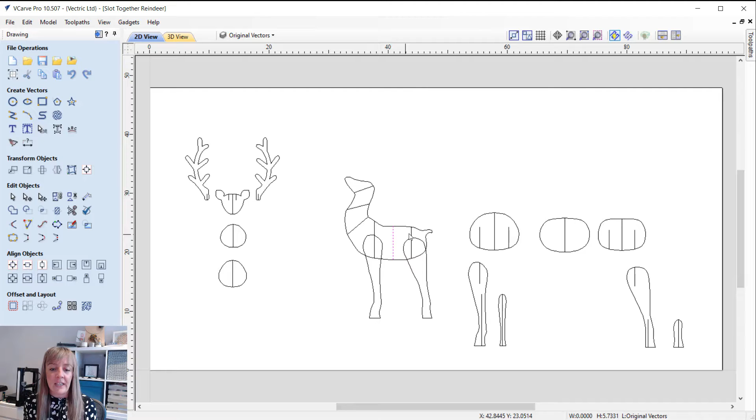Okay, so in terms of the file, we'll just take a look at how I created this. So I started off by just drawing out the rough side profile of a reindeer. So we've got the main body, we've got two legs, and then what I've done is I've actually split up the side profile with a series of lines, and these lines basically represent where I want to slot in the front facing parts, and each one of these lines actually matches up to a corresponding shape that you can see over on the left hand side.

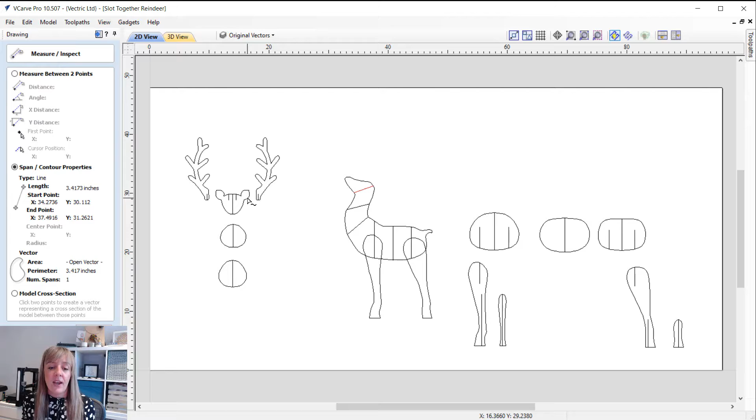Okay, so this shape matches up with this line here, so if you go to the measure tool and use span or contour properties, we can see that we've got 3.4173, 3.4173. And so by using the exact same length of line, we're able to then create the front facing part, knowing that when we ultimately come to slot it together, it's going to take up that whole space there. So that's why we're doing that, just so that we can ensure that we are working with accurate measurements and that it all matches up. So I've done that for all of these.

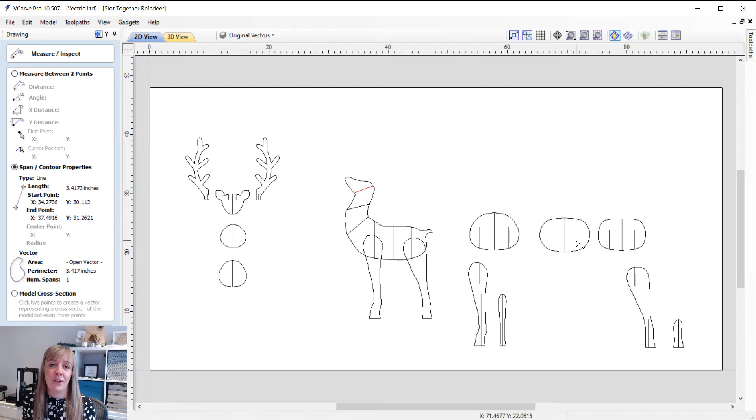But for this, I'm just going to give you the file and I'm just going to tell you what you need to edit according to your material thickness, so you can just get that on the machine and get it going. So this is pretty much all of the parts. So then with those parts, I then edited the slot sizes. So you can see now that all of those lines that represent those slots are now split in two at the halfway point. It's just the easiest way to divide them up.

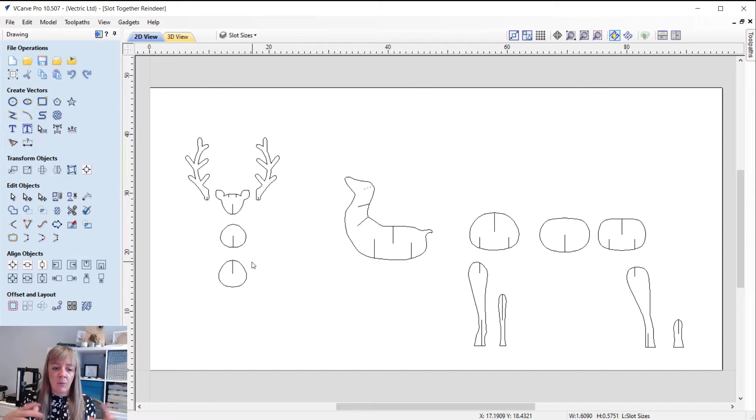You can divide them up how you want, but for me, I just find it super easy just to split them in half. And so we're going to be cutting into all of the lines that you can see here, whereby we will create slots for them shortly, and those slots will enable us to slot the alternate part, the front facing part that matches up to those side profiles. Okay, so those are just your slot positions, and then we've got the actual slot sizes.

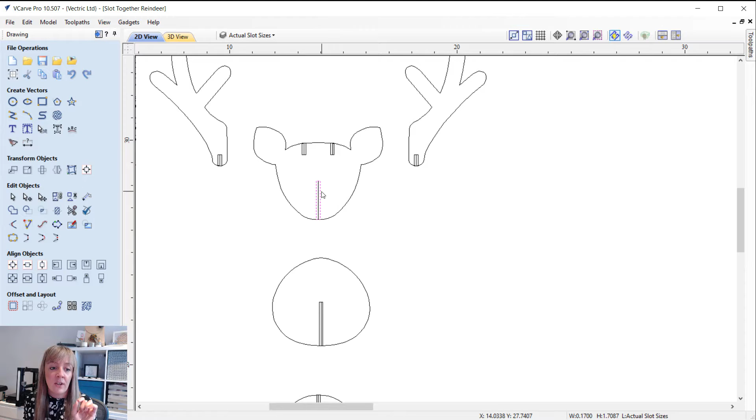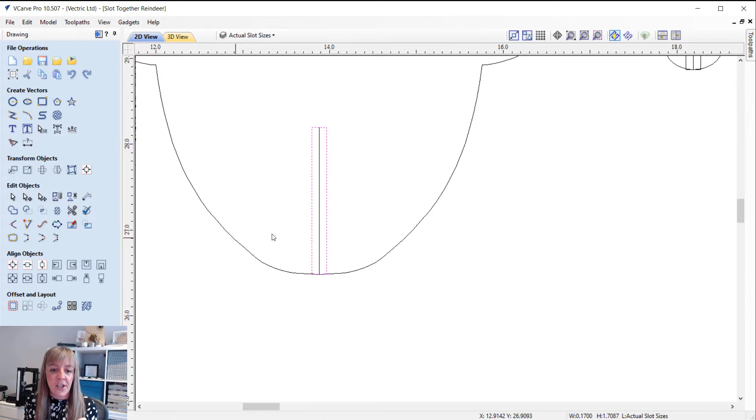So this is the layer that you're going to edit, and it's going to be edited according to your material thickness. This is a slot together project. You need to ensure that your slots match up to the material thickness that you are using. So in this case, my slots all come up at 0.17 inches wide, as that's the material that I'm using. So all you'd need to do is go in here, go to the set selected object size tool, where you'd set your anchor point in the center of that rectangle. You're going to uncheck link XY, and you're just going to alter this value to your material thickness. And you're going to do that for all of the slots and make sure you don't miss any of those out.

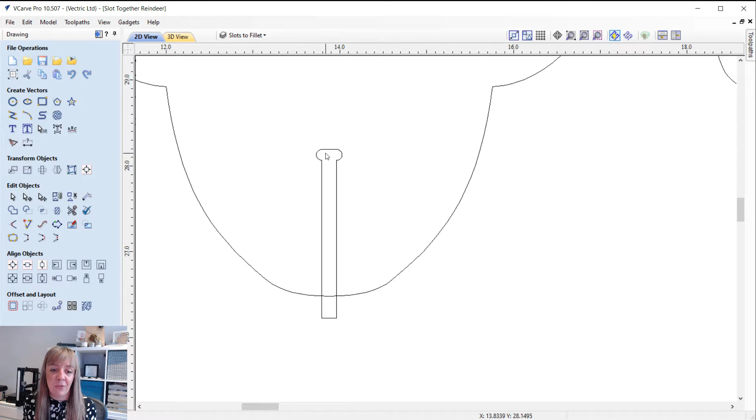And once you've done that, you then need to fillet those slots, because we're cutting into those slots using a round tool. We need to ensure that we can cut out all of the corners. Now round tools can't cut into corners, and that's why we need to make use of the fillet tool to ensure that our round tool can actually come in and cut those corners. Now ideally, I'd prefer to use dog bone fillets.

It just so happens that the material I'm using is 0.17 inches thick. The smallest tool I've got is 1/8 of an inch, so they are very close in terms of their width, so I can't get my 1/8 inch tool to create those dog bone fillets that for me look much more desirable. You can't really see, there's no evidence of those fillets there when you use dog bone fillets.

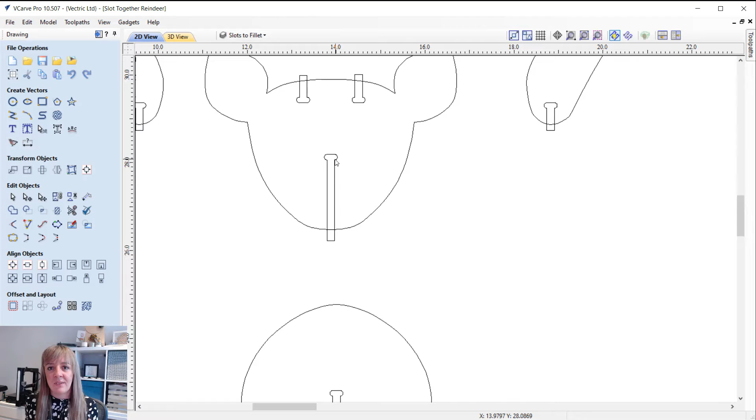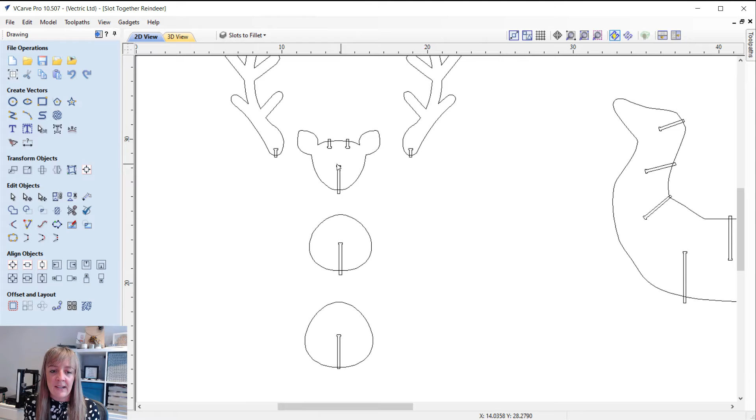I can't fit those in, so I'm using T-bone fillets, where you are able to actually see those slots. For example, I've got a test piece here, and when the two come together, you can see the actual holes, which isn't too bad, it's not a problem, but in an ideal world I'd recommend that you use dog bone fillets. So you're going to do that to clear out your internal corners.

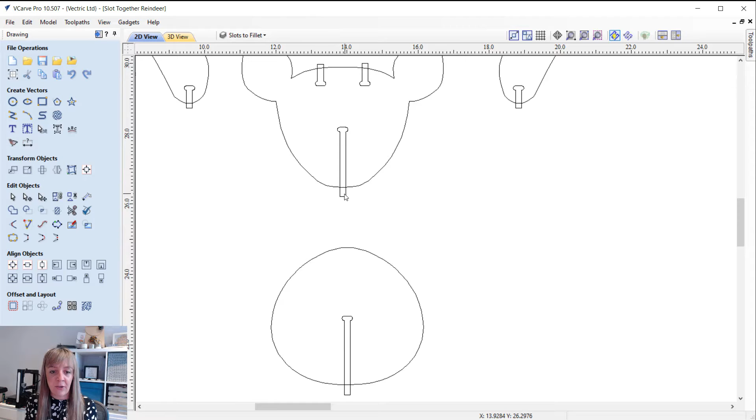Not only that, what you want to do as well is just extend all of these slots outwards, because we are pocketing them, and so we don't want to be left with the cusping effects that we're going to get from the tool cutting into the original slot vector. So just pull them out a little bit to ensure that we actually cut past there.

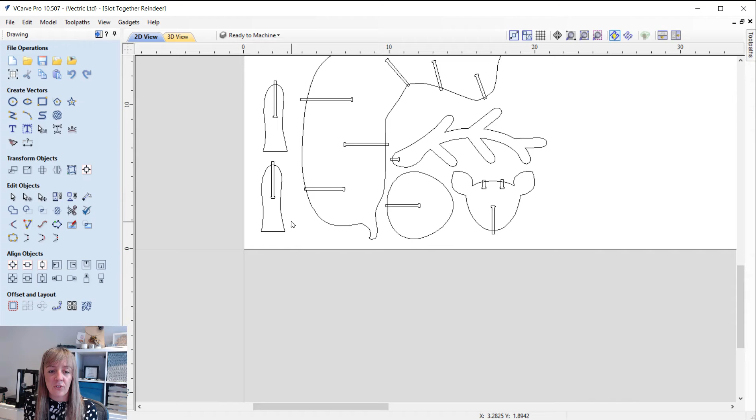Okay, and then what I did was I then duplicated the legs so that we have 4 sets of legs, and then I simply nested them. If you are using desktop, that's fine, you can just lay them out yourself, ready to machine. So I used the nested tool to basically nest all of my vectors. I've got 2 extra parts here that I want to use to do my test cuts.

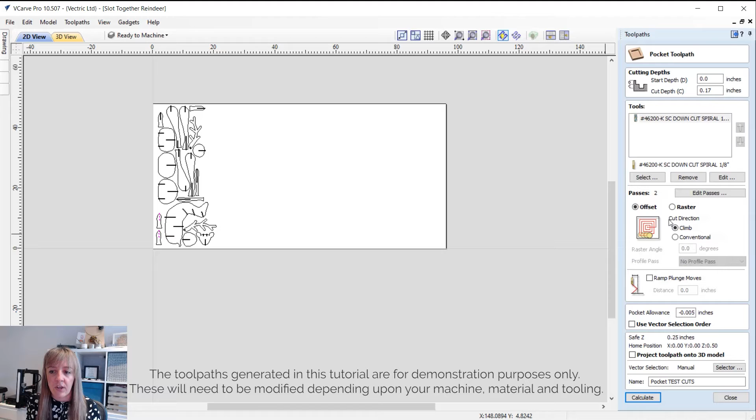It's very vital that you do test cuts to check that you've measured everything correctly and that your allowances that you're going to apply on your pocket toolpath are perfect for your slot together fit, so it's not too tight, neither is it too loose. Right, and so with everything laid out, let's take a look at the toolpath. So you can see I've got pocket test cuts, so if we just double click on there, you can see we're pocketing the slots there.

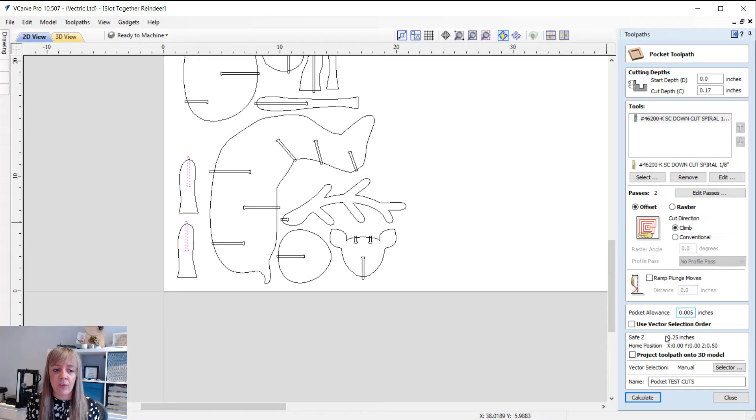I'm cutting all the way through the material using an 1/8 inch end mill. Okay, I'm just doing that in an offset strategy, and I'm putting in an allowance here of -0.005. It's just a number that always works for me, so that's why I'm going with that. But this is crucial that you also try this, and if you find it's too loose, you want to just tighten that up. If it's too tight, then you want to increase that value. And that's just going to overcut it by this amount that we've got within this allowance.

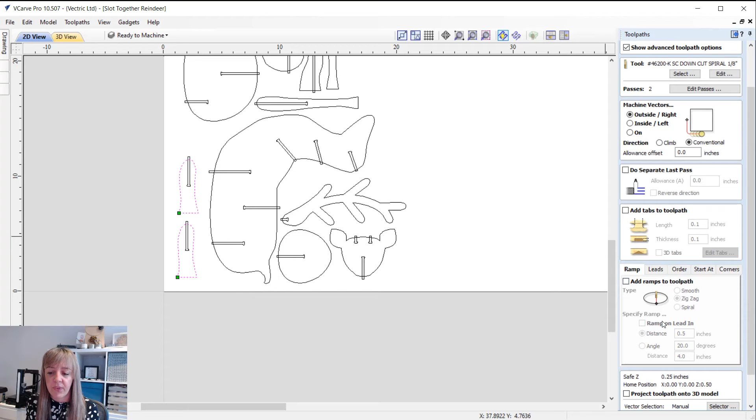Okay, and then in terms of that, we'll preview that, it's just a pocket cut, and then we'll move on to the profile cut. So we're cutting the actual leg stands out. So if we double click in there, you can see we're cutting all the way through using the same tool on the outside. I've got no tabs here. I'm using double-sided tape to hold everything down, just so that I don't have to detab all of these intricate parts.

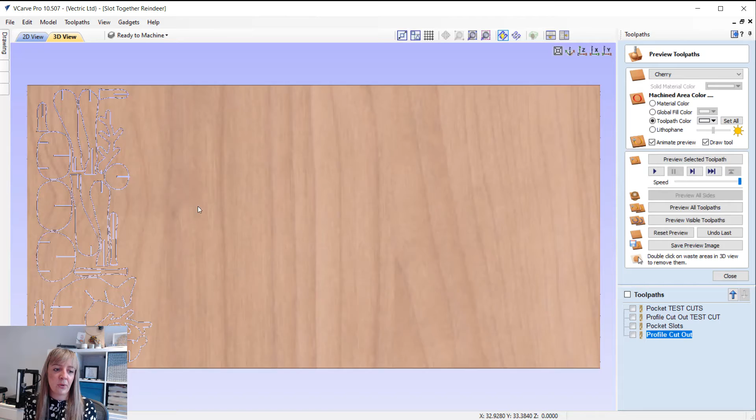Then you'd run those files, so you'd make sure that you're happy with your test cuts. If you're happy with that, then you can apply those same settings for everything else. So we've got the pocket for the slots, and we've got the profile cut out for everything else, and so it should look something like this. So we'd run the test cuts for the pocket, just simple lines, profile cut for the test cut. There you go, there's your cutout, and then we've got the pocket for the slots, like so, and then we've got the profile cutout. And if we double click the waste material, we're going to be left with parts that look something like this, okay?

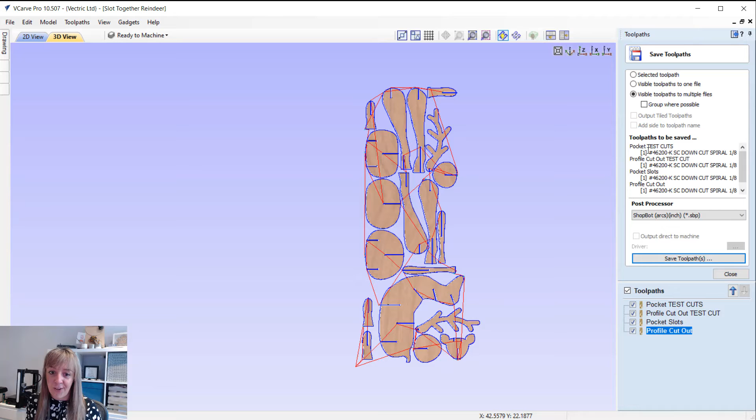And then you can go ahead and save out your toolpath. So in this case, we could just select all of them, just for ease of use. I'm going to use visible toolpaths to multiple files. We're using the same tool, so we're just going to save that toolpath out, and it's just going to basically save all of those individual toolpaths out for us. I'm doing that purely because I want to make sure we do our test cuts first. I don't want to run these all together, and then we're going to do the slots and the cutout afterwards. Right then, so let's head over to the labs.

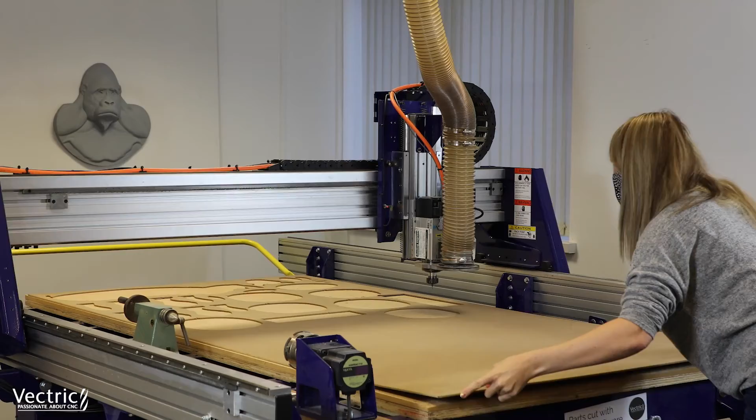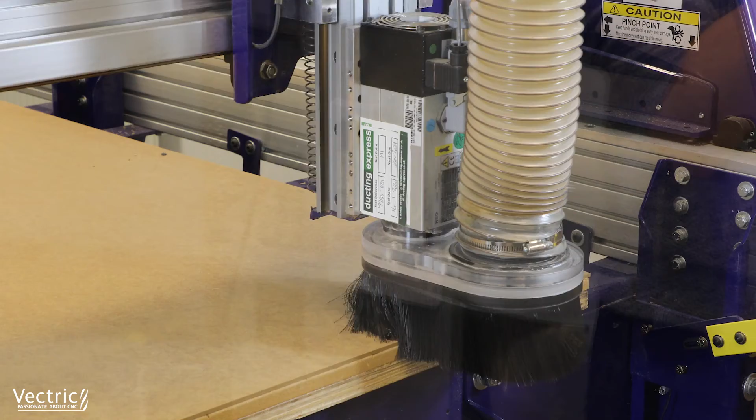So here we are just using double-sided carpet tape just to line our MDF, ready for us to use that as our hold down method. And I'm lining that up to the machine, and then just for extra security I'm just going to screw in 4 screws just to ensure that that sheet does not move. So first 2 toolpaths we're running is the test cut. So we've got a pocket pass as well as a profile cutout, and we're just testing those 2 little legs.

Here all I want to do is just check for the fit of the 2 as they slot together, which they slotted together perfectly. So I was happy with the settings we had there, and that enabled us to run all of the other toolpaths, so the pocket toolpaths for all of the slots, as well as the profile toolpath for all of the reindeer shapes.